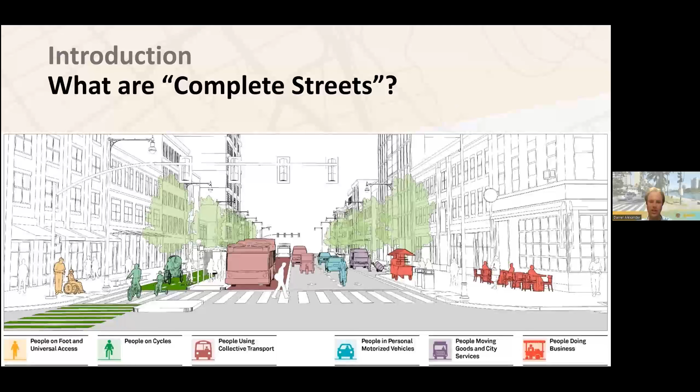So this goes into really shaping our projects. This is just kind of an idealized vision of it, and you see we have a place for all the users. This isn't what every Complete Street looks like, but this is kind of the ideal vision. You have a place for general purpose traffic, a place for buses, a dedicated protected place for people on bikes, and wide sidewalks that are ADA accessible with safe crossings that accommodate pedestrians safely as well.

So jumping into our project, what we're talking about tonight is Ala Wai Boulevard, and our project's extents go from Kapahulu Avenue to Kalakaua Avenue. The opportunity really is that this street is going to be repaved in the near future. And so the practice of our Complete Streets program is when we have a repaving project coming up, we look at how we can make that street better, getting those improvements in a really cost-effective way.

So in the coming years, Ala Wai Boulevard is slated for repaving, and at that time the improvements that come out of this plan would go in. These are the extents of that repaving project, so that's really what we're tied to and the unique opportunity we have here.

So moving along, to give you a sense of where we are in the process - for about 2 years we've been working on this project in earnest. We went out, did a lot of data collection, and a lot of hearing from people to understand the values and interests of folks within the community, and we started developing designs. Now we've got a draft design and draft plan that we're ready to bring to you all and hear more about how we responded to those issues, and whether we need to make adjustments before we finalize those plans so they can move forward.

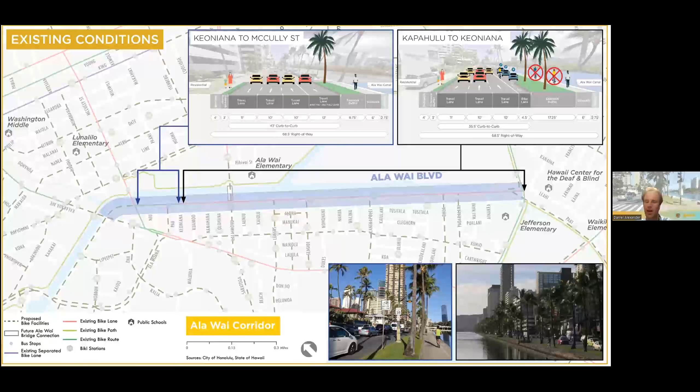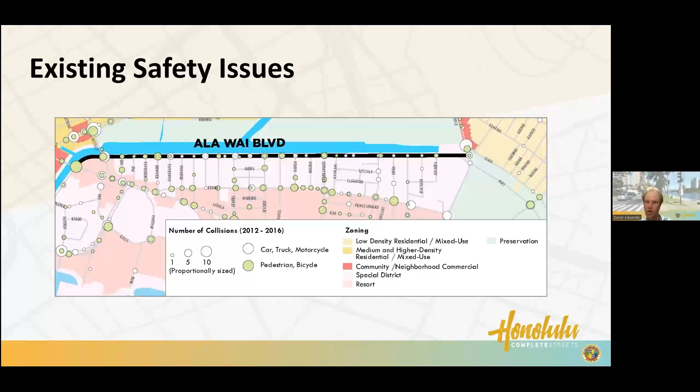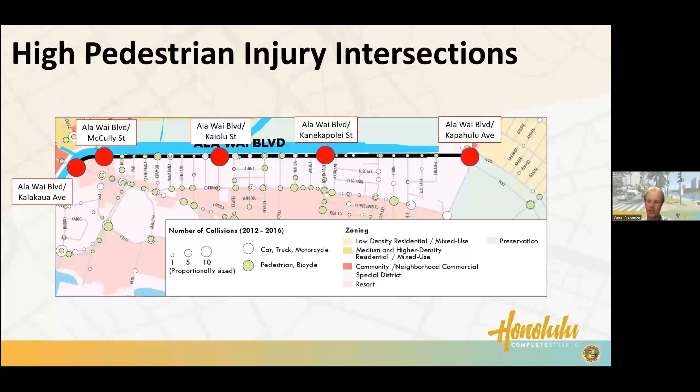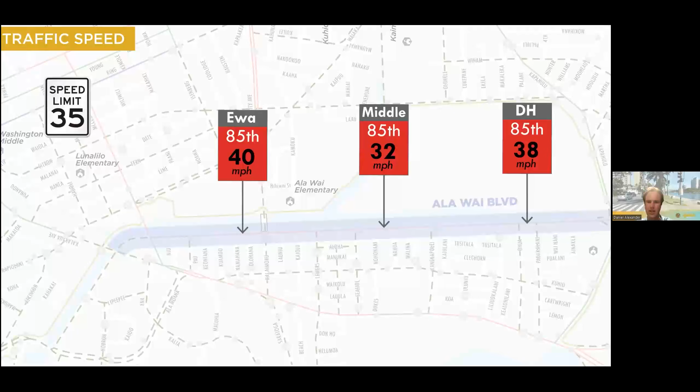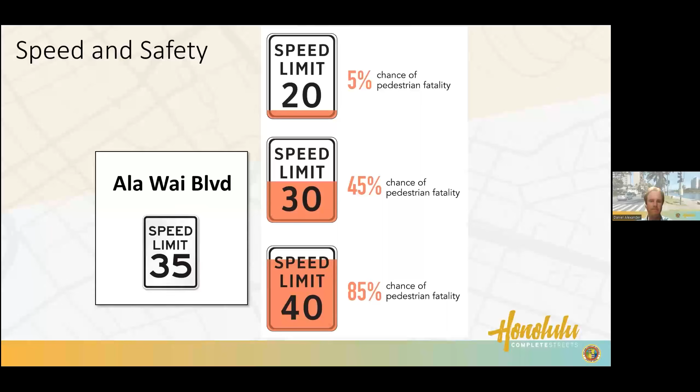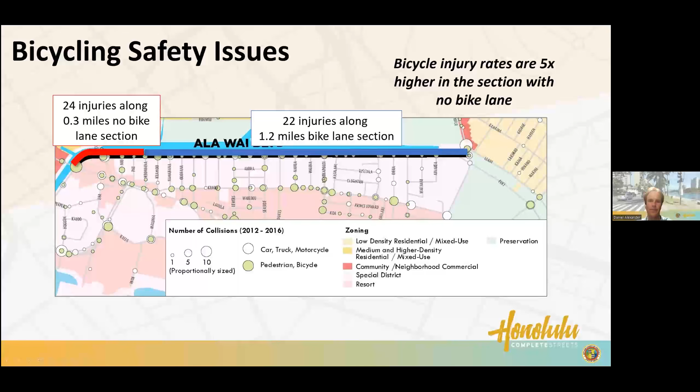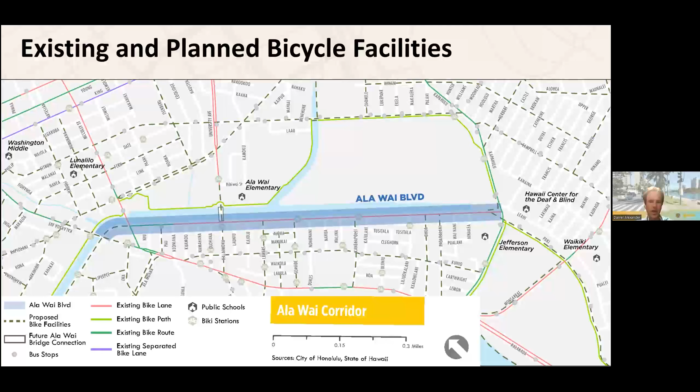So this goes over some of the proposed facilities in the project area. I'm not going to go over it in great detail. This is from our Oahu bicycle plan, and it does propose a protected bike lane along the length of our corridor. You see some of the other bicycle connections in there as well, of course McCully Street, which exists, at Kapahulu, which exists, and then the future Ala Wai pedestrian and bicycle bridge.

Next slide. So, I think as Director Morton said, this project is really about balancing the demands on this street. It's a street that serves a diverse community and a diverse set of needs, and part of that is vehicular traffic and making sure the street continues to support the vehicular traffic that's there.

And that builds up as you go towards McCully. So this is something that's been really instructive in our design and making sure that we continue to support the traffic that's out there. Next slide.

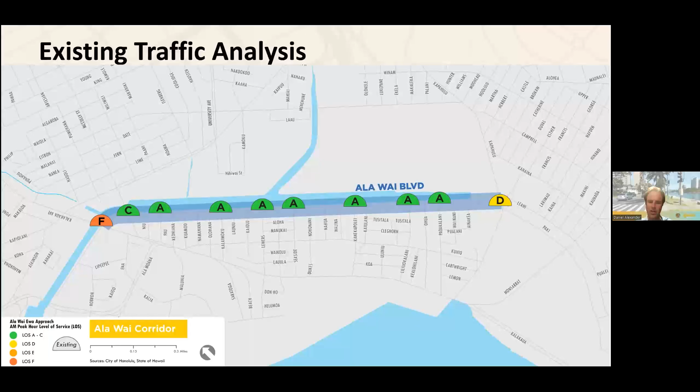So of course, another function of the street is it provides parking, and it's a significant number of parking spots. It's 198, unmarked, so that's an approximate number, but that's what we would see out there if we go and count. So placing it in the context of parking within Waikiki, where we have done Waikiki-wide parking studies, it's a small percentage of the overall public parking within Waikiki, about 3% of the overall parking. Even if you look at all the on-street parking, it's still a small percentage of that total.

And then another thing is, we looked at the occupancy of the parking, how it's being used, the patterns of its use.

As many would know, it's very highly utilized. It's very hard to find a spot. And when we went and looked at turnover, where we actually do recording to see if cars moved, we found that it's not being used by that many cars actually. If you average it out, it's about 1.5 vehicles per parking spot per day that are using the parking spot along Ala Wai. So it's currently really heavily utilized, but it's not servicing a large number of folks.

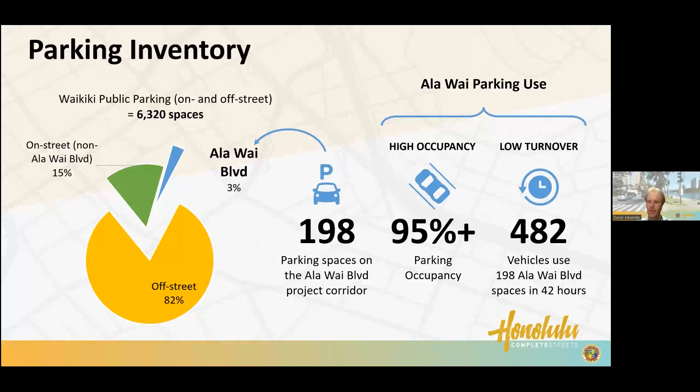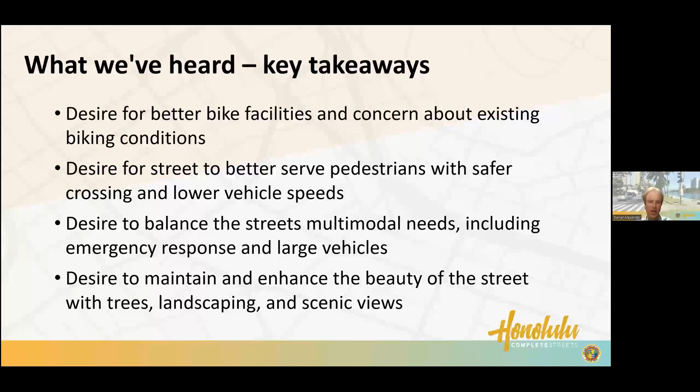So these were some of the things that we tried to advance in our plans. Next slide. So here's a little summary of the online comments we received. I won't go over it in great detail, but the majority of the comments were focused on bicycle and pedestrian safety.

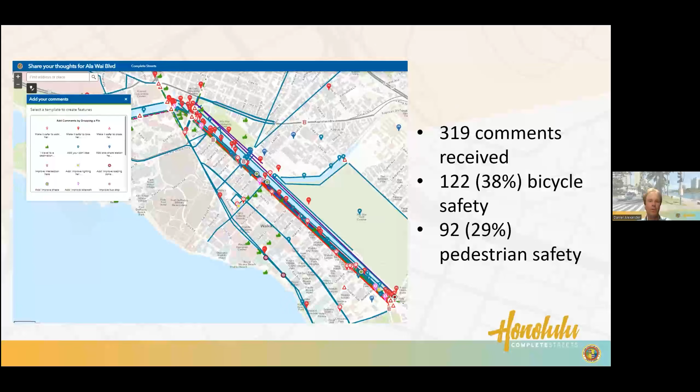Next slide. So some of what we heard in that kickoff meeting - we asked people what mode they thought was most in need of improvements on the street, and we heard resoundingly that bicycling was the mode that most needed to be improved. And of course, walking and motor vehicles were in there as well. Next slide.

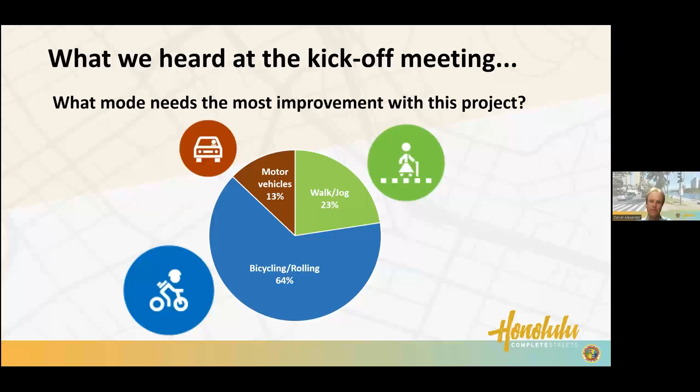And when we got into talking about some of the improvements, we heard a particularly strong interest in protected bike lanes and speed reduction. Those came out as our top, and then new pedestrian crossings, curb extensions, shared use path. You can see the interest there, and we've tried to roll with that.

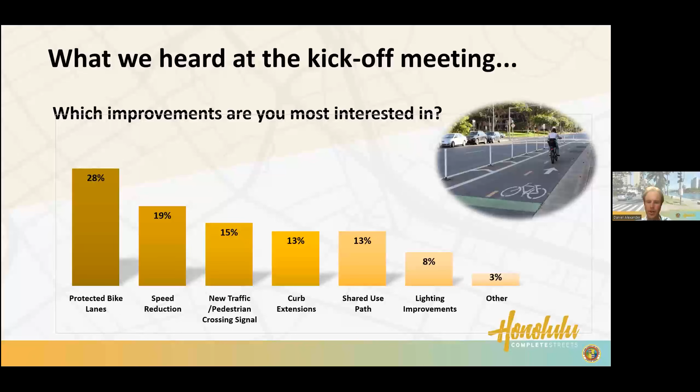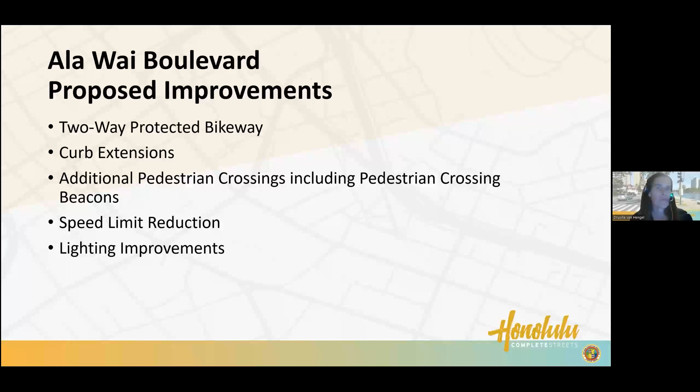So I would like to start talking about the two-way protected bike lanes. Looking at the current conditions, along much of Ala Wai Boulevard there's a bike lane in the same direction of travel between parking and fast-moving traffic. We know this existing conventional bike lane is relatively high stress and just isn't the sort of bikeway many people feel comfortable bicycling in, in addition to only being one way.

Between Keoneana Street and McCully Street, there is no bike lane and bicyclists share the lane with traffic. We have heard from so many that this area serves as a major barrier to cycling on Ala Wai Boulevard and in Waikiki.

In order to improve this experience, we looked to our other bikeways that exist on the island, specifically protected bike lanes. We have seen ridership increase with these bikeways already in place, and we know there are positive impacts of protected bike lanes from national studies on all people using our streets. We have specifically documented safety benefits locally here on South King Street, where there has been a 50% reduction in pedestrian injuries since the protected bike lane was installed.

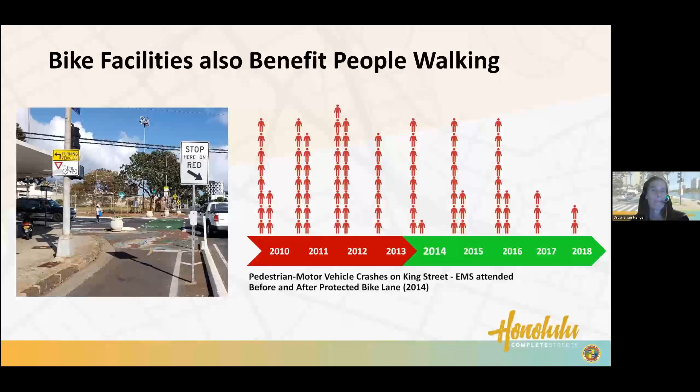So the two-way protected bikeway is proposed to connect from Kapahulu Avenue to Kalakaua. This bikeway type will support riders traveling Ewa by taking them out of the travel lanes, and people walking and bicycling Diamond Head-bound will experience safer conditions as well, because riders are able to get off the sidewalk to travel towards Diamond Head. It also provides the opportunity to introduce more legal pedestrian crossings without traffic signals because of reduced travel lanes, and provides a connected experience for all active transportation users.

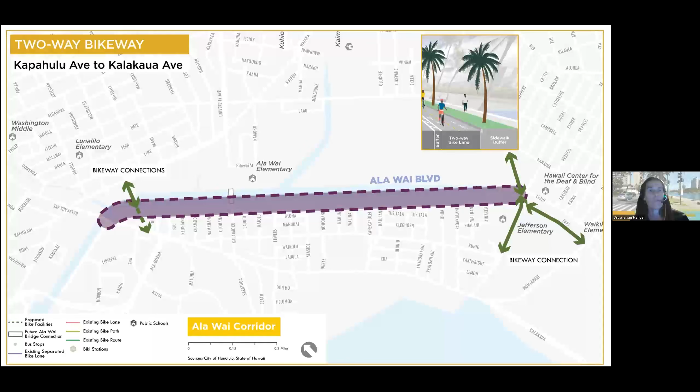The benefits of this alternative include speed reduction, which provides safety benefits for all road users, reduced pedestrian crossing distance and exposure, increased visibility of pedestrians, and a better organized street for all roadway users, including a sidewalk dedicated for pedestrians and a dedicated bikeway for bicyclists.

We're illustrating the improvement here. The two-way protected bike lane is proposed to be a 24-hour per day facility. This rendering illustrates a section of the proposed bikeway as the general purpose lanes transition from 2 lanes with parking to 3 lanes without parking during the peak hour, and then back to 2 lanes with parking overnight when traffic demand is lower and parking demand is higher. We're going to go through each of these cross sections together.

The materials on the next slide show some potential materials for this protection. They've not yet been selected, and we'd like your community input tonight during the breakout rooms. The intent is to have vertical separation that supports the aesthetics of the canal and quay while providing protection that keeps drivers from mounting the curb to park or inadvertently turning into the bike lane.

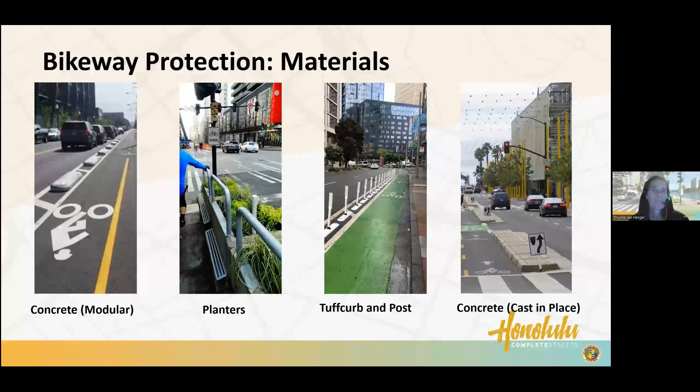I will share information about 3 typical sections along Ala Wai Boulevard. The traffic volumes in the section from Kapahulu to Nohonani are significantly lower than in the section closer to McCully, as Daniel provided information about previously. So in this section, 1 lane for general purpose travel by cars, trucks, and buses will be removed, and the parking will be moved 12 feet away from the canal. Analysis for this option confirms that the quality of the driving experience will be acceptable and comparable to today's experience. The 2-lane section also provides wider travel lanes to better accommodate emergency vehicles when they need to respond directly on Ala Wai Boulevard.

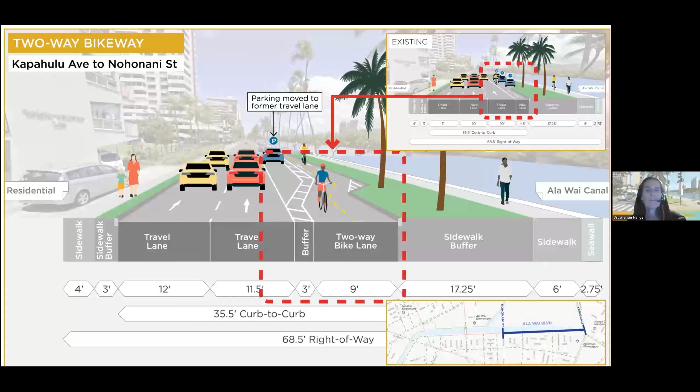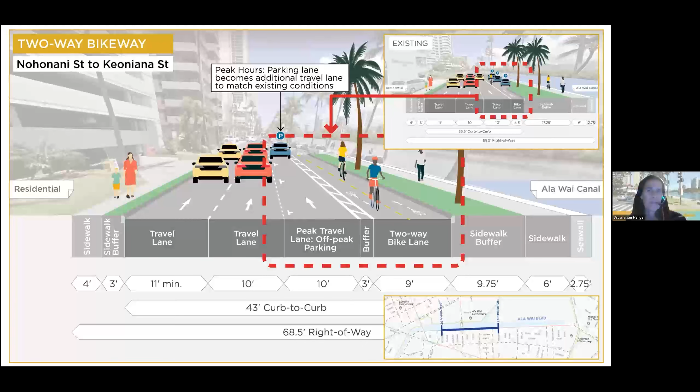From Nohonani to Keoniana Street, the parking lane becomes an additional travel lane to match the existing 3 travel lanes during daytime hours. It converts to parking overnight when traffic demand is lower.

On the 3rd typical cross section, where general purpose traffic is heaviest, from Keoniana to McCully, 3 lanes of traffic and 2 lanes for the right turn onto the bridge will be maintained. Where these lanes are needed all day long, this design is accomplished in part by removing the bulb-outs and relocating the trees on them. This design with additional lanes maintains capacity for trucks, buses, and cars based on both our community input, a trial demonstration we conducted last year, and technical studies. Mike's going to tell us more about that.

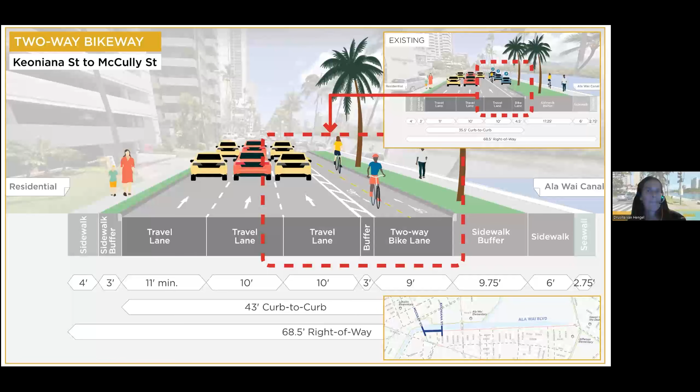Aloha, everyone. I'll be taking over here, and we'll just be looking at the final block of the proposed bikeway between McCully and Kalakaua. This slide shows the 2-way bikeway on that last block after McCully Street. A 2-way bikeway here would help get people further west in Waikiki and towards the Ala Moana area. It will also connect to the 2-way section of Ala Wai Boulevard west of Kalakaua, where cycling is much lower stress. It's a 2-lane road on the other side of Kalakaua.

This can be done by utilizing a redundant channelized turn lane that exists—you can see it there on the bottom photo. We won't have to remove any through lanes or impact traffic at the Kalakaua intersection, where Daniel showed you earlier that traffic was the worst. So we won't be making any changes there or removing any lanes to continue the bikeway forward.

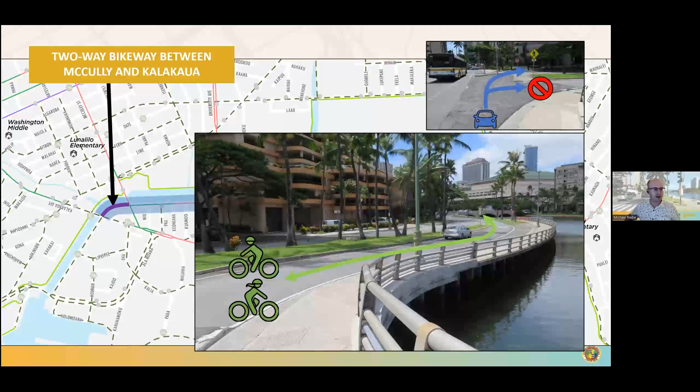This next section will go into some of the trade-offs made with the needs of different modes and street users. This slide shows our technical drawing of the McCully Street intersection, one of the busiest along our corridor. Here we looked at lane configurations with several different options. We studied removing the second right turn pocket onto McCully, but found through testing and modeling that it was needed due to high traffic demand during the peak hour.

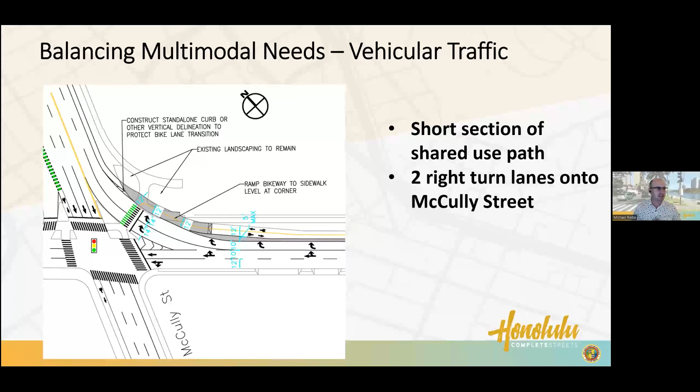So we ended up making a design change here. What we've done, as you can see, is move the bikeway up to the sidewalk level so it becomes a shared use path, allowing us to preserve that second right turn pocket. This shows some of the balances we've made through the design as we've worked through it.

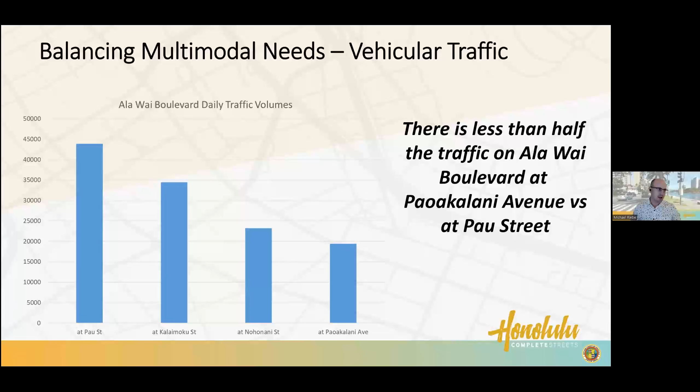From Keoniana to Nohonani, there would be 3 lanes all day, 6 a.m. to 7 p.m., and then 2 lanes overnight in that stretch. As you go further Diamond Head, where traffic is significantly less than half the amount of vehicles per day using it, there would be 2 travel lanes 24 hours. By doing that, we're able to preserve parking 24 hours and preserve the curb extensions where there are trees, which I'll talk about in a second.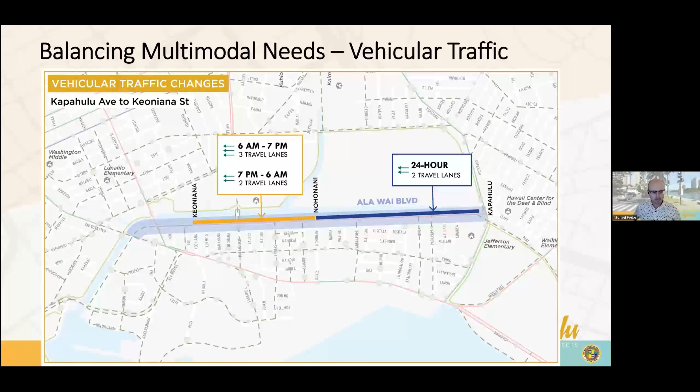This is the second form of the slide we showed earlier, showing that we did detailed traffic analysis along the full corridor. We studied it at the highest peak hour volume of the day, which is the morning peak, and used many different scenarios and configurations. This is what we ultimately came up with, and these are the final results.

This slide shows the existing and with-project level of service. The top part is existing, and the bottom is what's proposed. You can see most intersections are not changing. Some are changing marginally, but they're still within tolerances. Then you have those intersections on the end, Kalakaua and Kapahulu, where we aren't making any lane configuration changes that would reduce the capacity, so they stay the same.

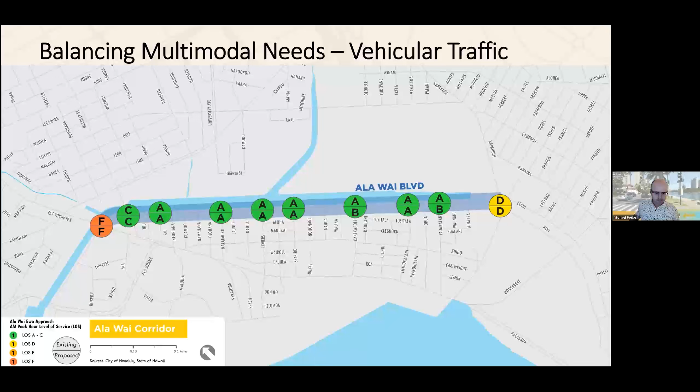Balancing needs of parking is something that we took great consideration for. There's currently 198 spaces on Ala Wai Boulevard, as Danielle mentioned earlier. These project plans provide 177 spaces, so we do have a marginal reduction.

You can see on that peak hour, or daytime rather, towaway area between Keoniana and Nohonani, 88 of the spaces that exist there right now would all remain. However, it would just become overnight parking only. So they would still be able to park overnight, but during the day there would be no parking. When you go onto the other side, the area in blue from Nohonani to Kapahulu, that would be 24-hour parking.

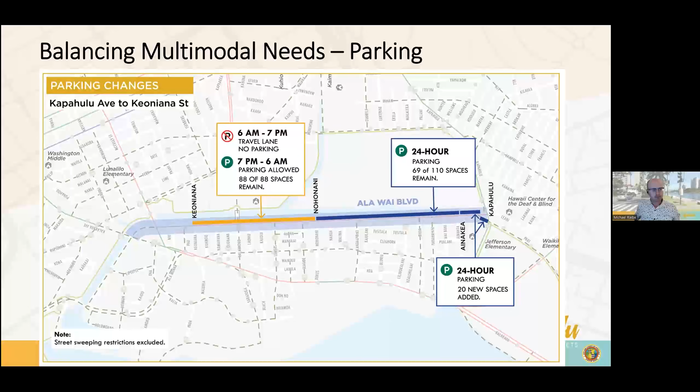That's where we see a bit of reduction, in order to preserve the curb extensions and the trees in the area. We're able to add 20 new spaces over near Kapahulu, which I think we have on the next slide, to try to get some of that parking back that we would need to remove for retaining the curb extension. We're able to add new full-time parking near Jefferson Elementary and the library near Kapahulu, so 20 stalls there would be added. In summary, there's 177 parking spaces left of the 198, so we're only removing 21 spaces along the corridor.

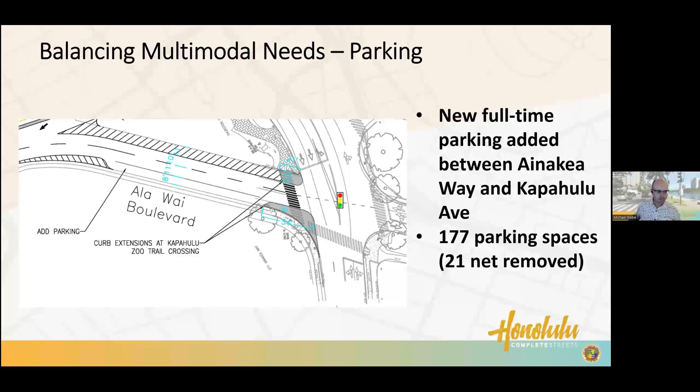Lastly, trees, mentioned a few times as we went along here. There are 316 total trees on the canal side, the Mauka side. This proposal impacts 56 trees, through the removal of the 9 bulb-outs as you go further Ewa, where the 3-lane section is. To maintain 3 lanes, we would need to remove those curb extensions, which means the trees would be impacted.

According to the Division of Urban Forestry and the Waikiki Special District requirements, all impacted trees in good health would be moved to suitable locations, and any remainder would be replaced 1-to-1 with new healthy trees, which would help us meet our resiliency goals.

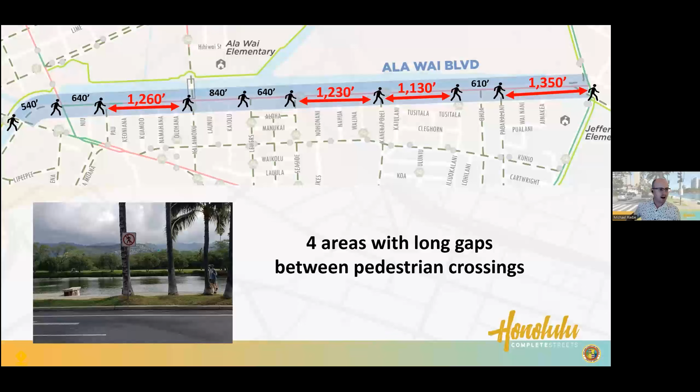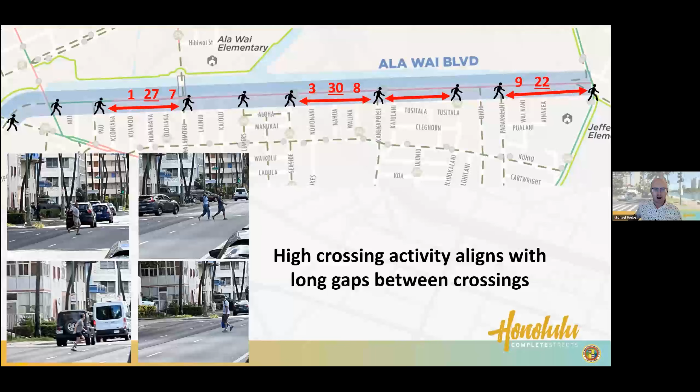With this, our plan on the next slide is to create 3 new pedestrian crossings: one at Namahana, one at Nahua, and one at Ainakea. That was based on the evaluations we did showing the amount of people crossing and trying to create those mid-block opportunities.

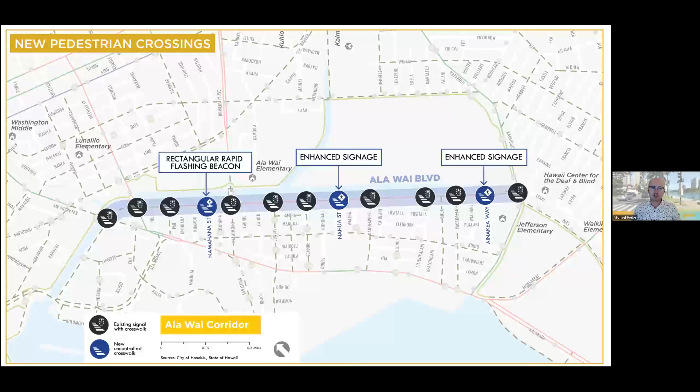With these new crosswalks, a variety of support treatments will be included - signage and other treatments to increase the visibility of people waiting to cross, which will increase yield compliance for people driving. At Nahua and Ainakea, where there's a 2-lane section, there would just be signage. At Namahana, it would be supported with a rectangular rapid flashing beacon - a proven safety countermeasure that reduces crashes and increases yield compliance, especially at nighttime. This is a light-up sign actuated by a pedestrian wanting to cross where there's not a signal, and that would be the treatment at the Namahana location.

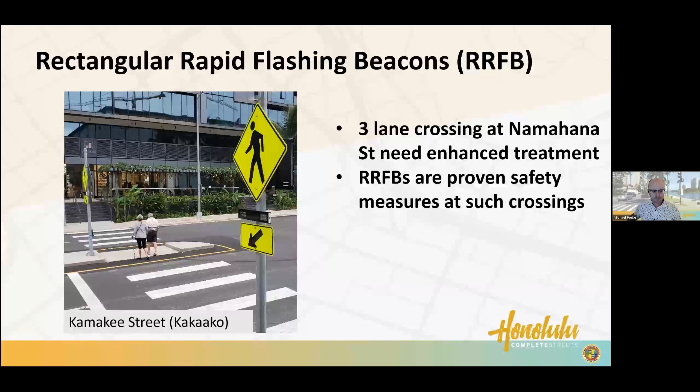You also see the warning signage facing the vehicle drivers so that they can see there's a crosswalk here and that they would need to yield.

So we have another poll. This one is: do you support additional crossings of Ala Wai Boulevard? Same response options as last time: like it; mostly like it but need some adjustments; neutral, if you don't like it or dislike it, just ambivalent; or don't like it or not sure.

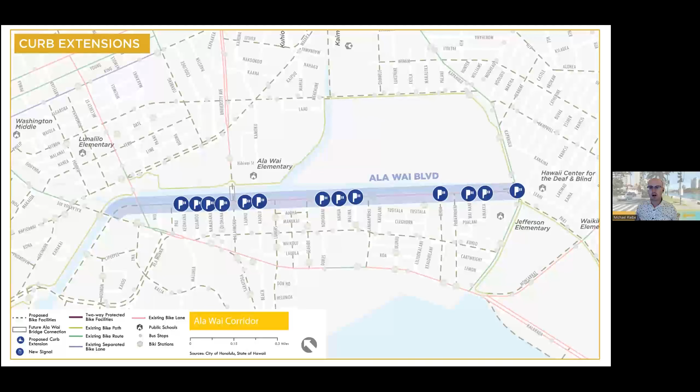The design team was able to look at every cross street on our corridor and we prioritized locations for curb extensions based on existing site conditions. We rated them based on ease of implementation and the benefit they would serve. We determined that 16 of the 21 cross streets between McCully and Kapahulu would be suitable for curb extensions.

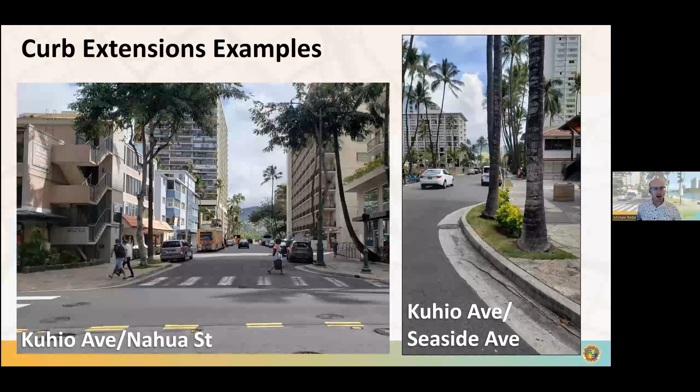On the next slide, just showing some examples of those for people that may be unfamiliar. These are curb extensions in a variety of forms. These ones are actually found in Waikiki on Kuhio Avenue, and these ones have landscaping in them. On the next slide, there are some more in other neighborhoods outside of Waikiki using a variety of different construction methods.

So the type of curb extension that ultimately ends up getting built as part of these recommendations will be determined in later engineering design stages. We want to look at the grading, the utilities, and funding considerations. We were able to get a leg up on that and prioritize them, showing all 16 of them in these locations on this plan.

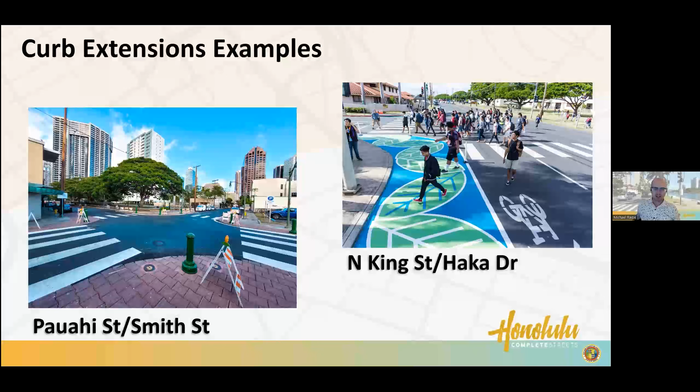The benefits of this are multiple: they slow the speed of turning vehicles, they make it a lot easier for drivers to see people crossing the street, and for people crossing the street to see oncoming traffic. It reduces the crossing distance significantly, the time it takes to cross the street, and reduces the exposure. So the benefits are pretty significant, and all you need to do is just fill in that excess pavement.

And we have another poll. This one is with regards to those curb extensions that Mike just talked about. We'll get that opened up for you. Same categories again: like it; mostly like, but need some adjustments, if you select that one please put it in the chat box; neutral; don't like; or not sure.

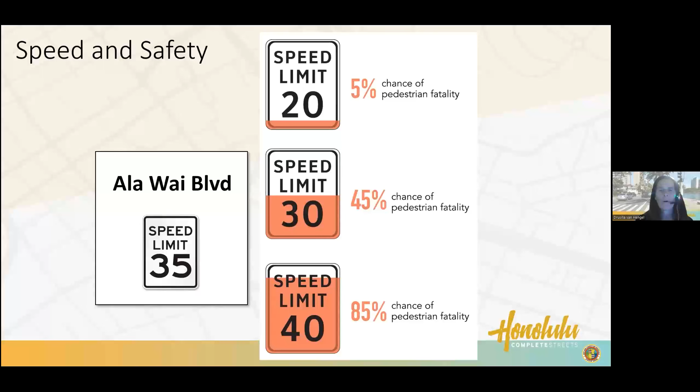In order to generally make Ala Wai Boulevard safer, and also in consideration that there will be more vulnerable users on the street, in the protected bike lanes, and at these crossings, DTS visited the possibility of removing the citywide 25 mile per hour exception on Ala Wai and reducing the speed to a limit that increases the possibility that someone walking or biking will survive if they're hit by a car.

Well over half of the traffic much of the day is going over 30 miles per hour. That speed at which there's a 50% chance a person would have life-changing or fatal injuries if hit by a car. Plus, we have 5 to 10% of drivers going well over the speed limit at more than 40 miles per hour, and that's in the purple colors up at the right.

This is in part because the street is currently designed for the small periods of time that constitute the peak hour. And when you design for that time of day, people are able to speed during the rest of the day when fewer cars are on the road.

So with this data in hand and the legal possibility of reducing the speed limits back to the citywide speed limit of 25 miles per hour, DTS proposes to use that to reduce the speed limit on Ala Wai to 25 miles per hour to increase safety as these new facilities are brought on board. This would have the benefit of improving safety for all roadway users.

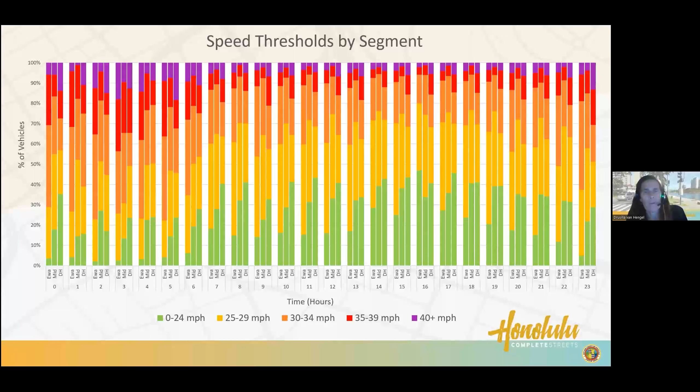And this is supported by other island-wide work that we're doing that explains that nearly 1/3 of traffic fatalities on Oahu actually involve excessive speed.

Oh thanks, I'm sorry, didn't say next slide. In addition, the 25 mile per hour speed, and the designs which give cues to drivers that 25 miles per hour is actually the appropriate speed to drive, will support multimodal activity and bring Ala Wai in line with the 25 mile per hour Waikiki district-wide speed limit.

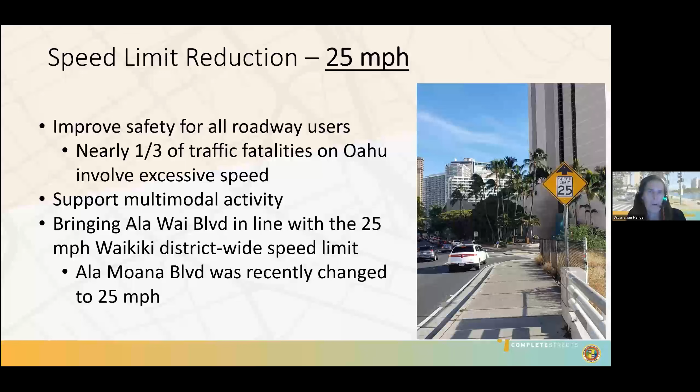Just as some background and support for you all, Ala Moana Boulevard was recently changed to 25 miles per hour as well.

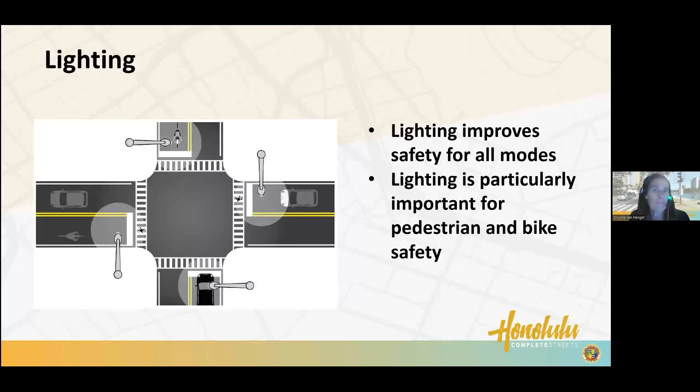The lighting study that's underway as a complement to the study will identify if new lights are needed and if the lighting level adjustments need to be made. Lights have already been upgraded to LED throughout the city, and they are capable of being adjusted remotely, which is something that was news to me and may be news to you as well.

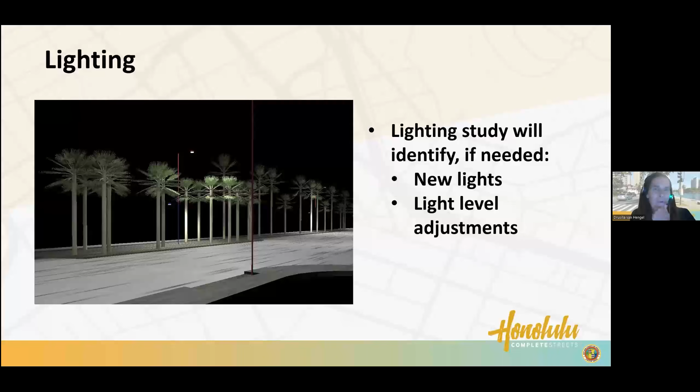And there's no poll about this one, but there's more input to be gained. Thank you, Natalie. Thank you so much, Joe.

So with that, we do actually have one more polling question, and this one is a select all that apply. It's kind of looking at all of the different options that Drew and Mike and Daniel went through this evening: two-way protected bikeway, which was the first thing presented, curb extensions, additional pedestrian crossings, the speed limit reduction to 25 miles per hour, and the lighting improvements. So those are, it's select all, the ones that you are interested in.

Winston, great question, as in, yes, correct. So of these options, which options do you like or think could be worth pursuing as future options? And once again, this poll is meant to serve as just a gauge, but most of the conversation is going to be happening in the breakout rooms, which is what we'll go into next.

So, and our 82 responses with some trickling in still.

And is everyone having an okay time doing the multiple choice if you want to on this one? Is that working for folks? Oh, Brian, you didn't get a poll again. Brian, do you want to send us a message? And Katerina, you can send us a message directly and we'll tally it up with the poll responses. I'm not sure why it's not working.

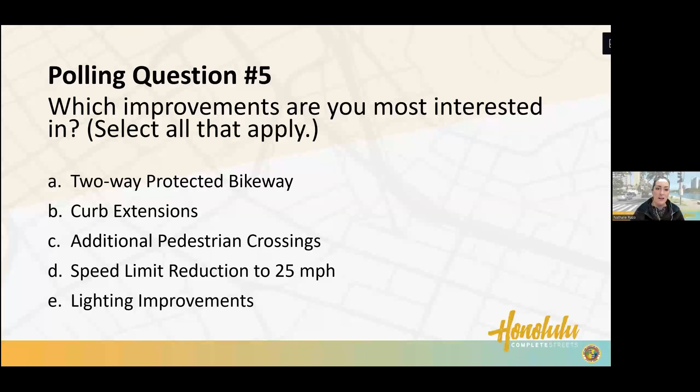So can you see the responses? 62% say two-way protected bike lane, followed by curb extensions, then lighting improvements, then additional pedestrian crossings and speed limit reduction to 25 miles per hour. I understand the percentages don't add up to 100% since it's a multiple choice answer. We will gather these comments and graph them together. If you're having trouble with the poll, please send us a direct message and we'll consolidate the responses.

So with that, I know I keep mentioning breakout rooms. What we're going to do now is for the remainder of the time, we will have breakout rooms available. We will have facilitators in each of the groups, along with note takers who will help capture the comments you're saying verbally and in the chat boxes. If you want to approach by raising your hand or putting it in the chat boxes, your questions are welcome and we're looking forward to the discussion. If you're not talking and waiting to talk, please try and keep yourself muted so everyone can hear everyone else. Our facilitator groups can help you with muting and unmuting as well. Time may be limited for some folks, so please respect other people's time and give everyone a chance to speak if they're interested.

I think that's what we have going on. We're going to open the breakout rooms, and once we do, you'll have another button pop up that says 'enter breakout room.' Click on that to get put into it. If you're having trouble, I'll be staying in the main room to help you get to a breakout room. For discussion points, the facilitators have some additional details.